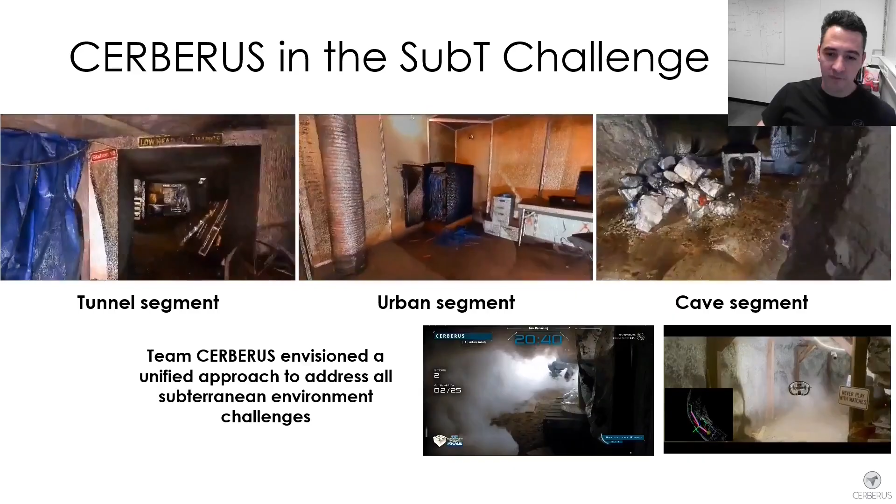As demonstrated by DARPA in the Subterranean Challenge, the interest is for a robotic solution that can navigate, explore, and search very diverse underground environments, from underground mines to subway stations to natural caves of different types across the world. Team Cerberus envisioned from the beginning a unified approach relying on legged and flying robots to autonomously explore and search such diverse settings.

In this presentation, together with my colleagues, I'm going to present how our team went about developing versatile robots for subterranean environments, the resilient perception capabilities on board our systems, resilient autonomy functionalities, artifact detection pipeline, and our solution for communications.

In further detail, we're going to discuss dexterous legged and flying robot systems in Team Cerberus, the multi-modal sensor fusion approach for resilient localization and mapping across all the robots of Team Cerberus, a unified exploration path planning methodology across legged and flying robots, our high-performance artifact detection and localization pipeline, and also our solution for self-deployed subterranean communications and networking across our robots.

And of course, I want to highlight that in this robot-oriented, robot-centric pipeline, the human aspect and the integration between human and robots persisted and remained particularly important.

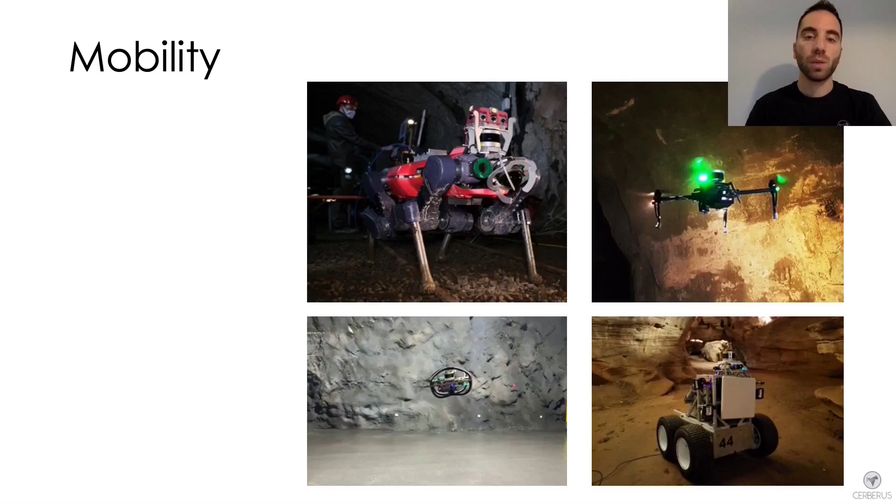Hi everyone. In this section, we will present the main mobility features of the robots of Team Cerberus. Specifically, we will talk about our legged, aerial, and ground platforms.

So let's get started. The first robot we present is ANYmal C, the legged platform used by Team Cerberus during the final event of the DARPA Subterranean Challenge. ANYmal is a quadruped robot produced by ANYbotics and customized by the Robotics Systems Lab to create its Sub-T version. This version is equipped with multiple sensors including LiDARs, depth, color, mono, zoom, and thermal cameras.

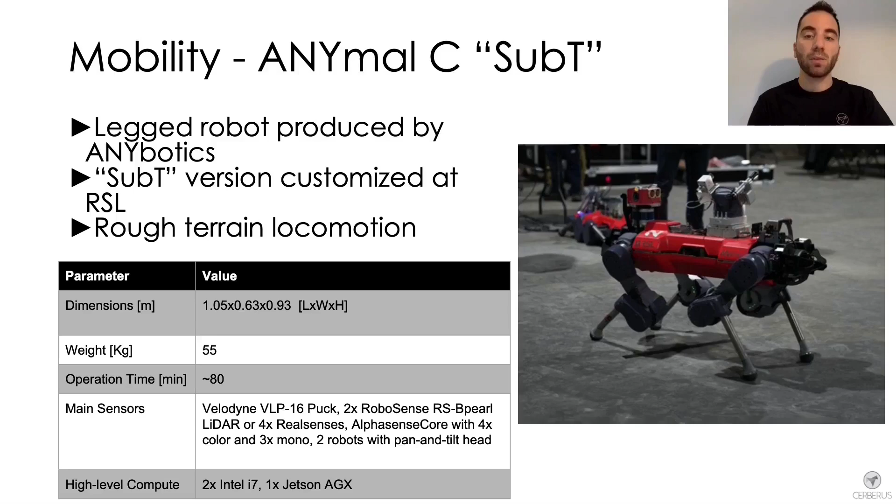ANYmal has a total weight of roughly 55 kilos, a payload capability of 10 kilos, and an operation time of approximately 80 minutes when continuously walking. During the final event of the Sub-T Challenge, we deployed 4 ANYmals in the course, and we had them operating simultaneously. In the following part, we will see the main software components used for locomotion.

The first module is a GPU-based terrain mapping software that is able to process input point clouds in real time and provide a terrain representation used for both locomotion and planning purposes.

This video shows an example of the robot navigating in a narrow environment while the terrain representation is built during operation. The elevation map you see is actually composed of multiple layers, each used for different applications. The elevation layer is mostly used for locomotion and visualization purposes, whereas the traversability layer is used to plan local traversable paths. Finally, the upper bound layer is used to handle negative obstacles during the local path planning phase.

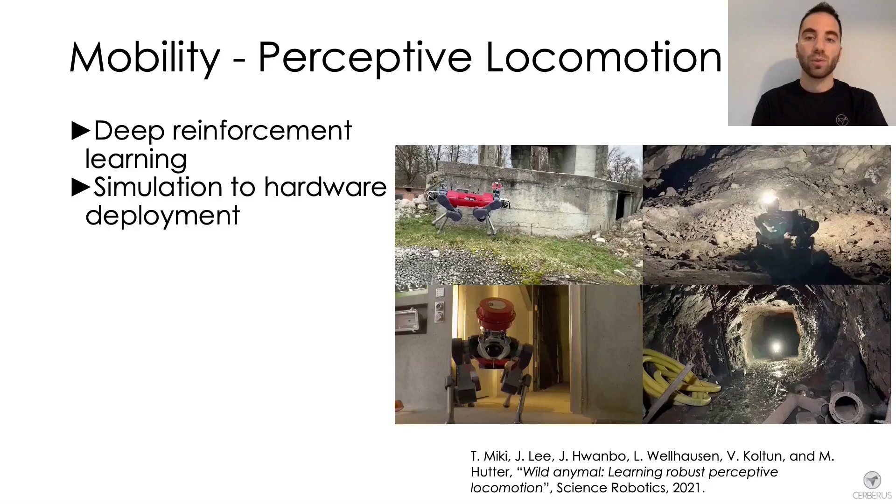Another main software component is our deep reinforcement learning based locomotion controller. This video shows the perceptive controller used in different scenarios with the ANYmal robot locomoting over a variety of rough terrains.

This controller uses a policy trained in simulation and directly deployed on hardware, and it is also one of the main differences with respect to the other teams that deployed legged robots with a model-based locomotion controller. To achieve a high level of robustness, we also apply randomization during training.

For instance, randomized height scans in the elevation map are applied to handle sensor degradation in extreme conditions and challenging environments. As you can see in this video, the robot is able to keep on walking even in an area where a lot of smoke was released.

Moreover, mass, frictions and external disturbances are also randomized to cope with slopes, stairs, and in general rough terrain. This policy was deployed on all the ANYmals during the final event and proved to be extremely robust and never failed. The third component used for locomotion purposes is a reachability-based navigation planner, utilized to generate local traversable paths.

This module is based on a reachability method which explicitly allows stepping over obstacles, and thus it is tailored for the ANYmal quadruped robots. Specifically, given a local terrain representation from the elevation map, the state of the robot and the goal to reach, the planner generates traversable trajectories.

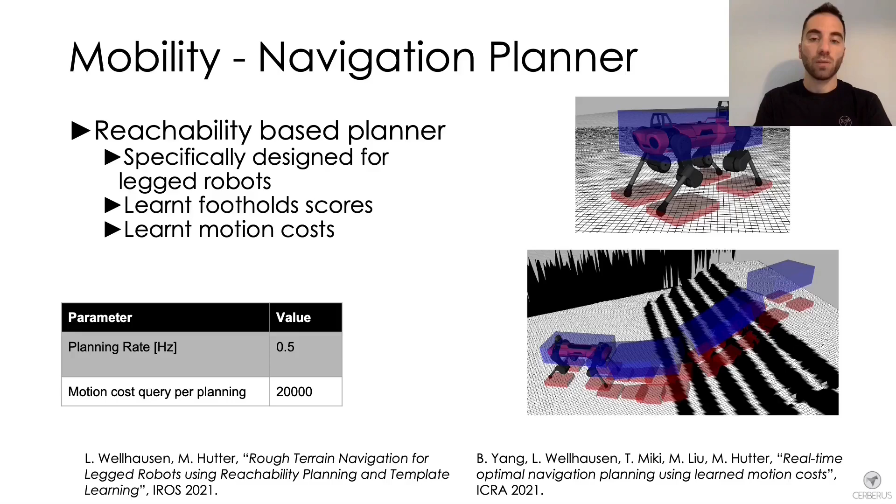Moreover, we provided the planner with template learning for steppable geometry to identify safe foothold locations. In addition, we deploy a local motion cost predictor that, given the height map and the current goal, provides estimated cost and risk, which then can be minimized during planning.

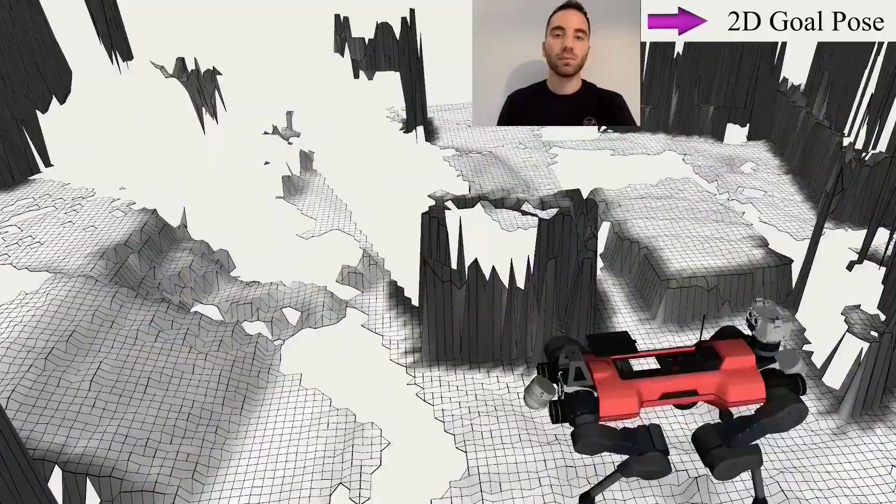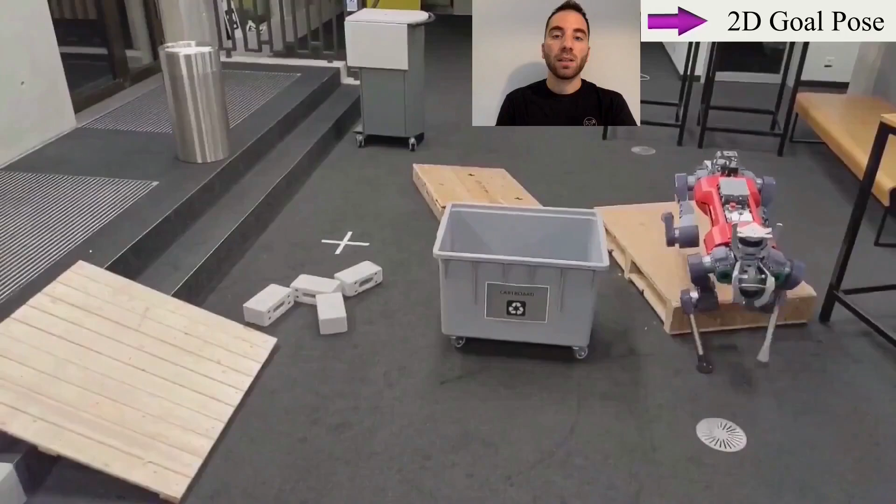This video shows ANYmal navigating different goal poses on uneven terrain. The planner copes with partial and missing map information and significant map noise caused by the onboard odometry system while maintaining fast update rates.

The second robot we present is RMF, a resilient microflyer drone developed at the Autonomous Robots Lab. With only 38 centimeters in length and width and a total weight of 1.4 kilos, this is the smallest and lightest drone employed by Team Cerberus. This drone features a LiDAR and a camera sensor.

Thanks to its agility, small size and robustness against collisions due to its custom frame, it can be deployed in particularly confined environments. In this video, we can see RMF autonomously flying in a narrow section of the tunnel area during the post-event of the finals.

The third platform we present is the Gaston Gagarin drone. This is also a collision-tolerant platform developed by Flyability and further customized by the Autonomous Robots Lab. This platform is specifically designed to cope with narrow environments and vertical shafts.

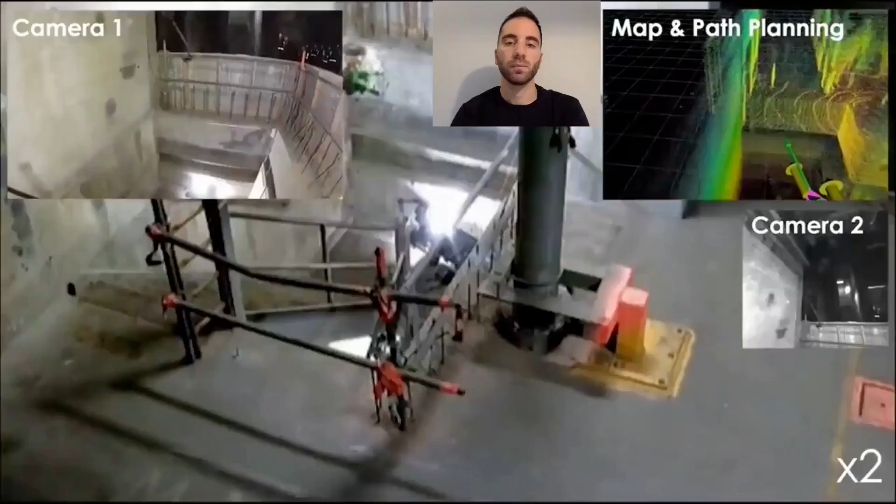The fourth robot we present is the Alpha Charlie platform. This robot is based on a DJI frame and a customized flight control software developed at the Autonomous Robots Lab. It's a bigger drone compared to the previous platforms, but thanks to its higher payload capability, it can carry a broader variety of sensors, including LiDAR, color, and thermal cameras.

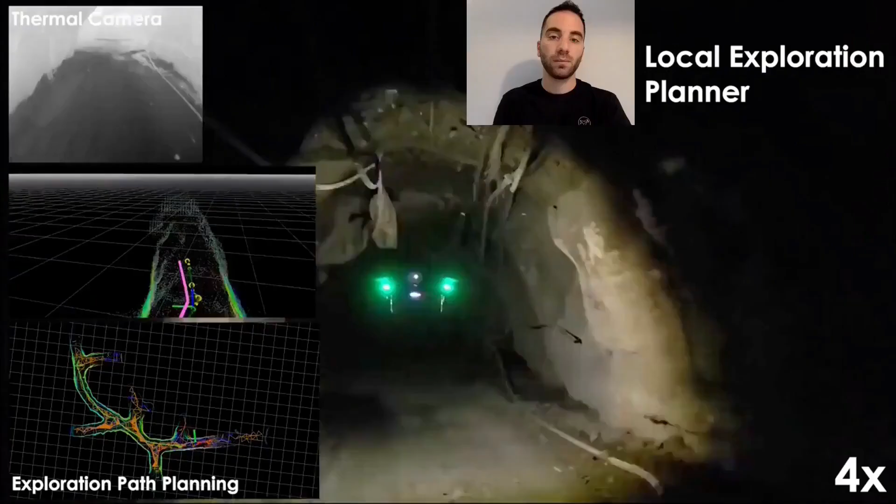Thanks to its multi-sensor suite, this platform can penetrate obscurant and dusty environments, also in the presence of smoke.

The last flying platform we introduce is the Voliro Kolibri drone. This tricopter drone is produced by Voliro and further customized by the Autonomous Systems Lab. The tiltable rotor design makes the Kolibri able to change pitch independently of its motion, as well as hover at any given orientation.

This platform has a considerable payload capacity and a higher operation time compared to the other drones of the team, and therefore it is specifically suited for long-term autonomy tasks in confined space, as well as vertical exploration tasks.

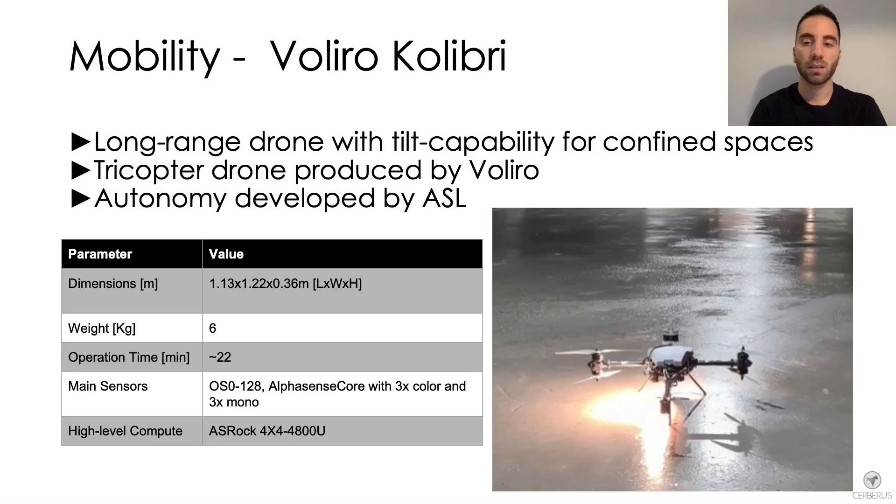The Armadillo Rover was the only wheeled robot deployed by Team Cerberus. It was used to support underground operations and extend communication range of the other robots.

It is equipped with a high-gain directional antenna and connects to the ground station using a fiber optic cable that can be incrementally released using a spooling mechanism.

I am Shehryar Khattak, and on behalf of Team Cerberus, I'll be presenting an overview of the localization and mapping approaches deployed by Team Cerberus in the DARPA Subterranean Challenge, and especially in the DARPA Subterranean final competition.

Robot navigation in austere environments presenting a number of challenges, for example darkness, fog, dust, narrow corridors, were an essential part of the competition. Early on in the competition, we in Team Cerberus identified that multimodal sensing would be a key element of our approach.

Given this, we investigated a number of localization and mapping approaches utilizing different sensing, for example LiDARs, thermal cameras, visual cameras, inertial units, and robot kinematics, and also understanding the synergy between these sensing inputs, how we can use them in a complementary way so that robust localization and mapping can be enabled for robots in these austere environments.

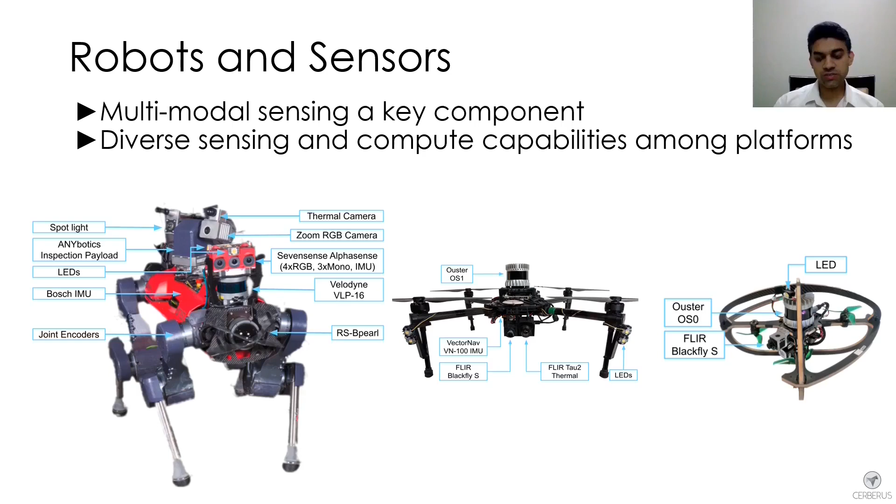Given these constraints and this diversity in compute and sensing modality, we opted to develop a flexible and hierarchical fusion approach. Flexible in the sense that given the subset of sensing modalities available, you can utilize them, and also flexible in that if compute is limited, we can choose not to fuse some sensing modalities and still have a reliable, robust approach.

We achieve this in a hierarchical fashion: estimators run independently, and if their estimate is good enough, it is propagated to the next step. If a module can't run, we just ignore it, and the pipeline always goes from left to right. We term this approach complementary SLAM, because it enables taking advantage of all the complementary capabilities that these sensing modalities provide.

For example, thermal cameras are very good when navigating through fog, and LiDARs are very good at creating large-scale maps or providing direct measurements. As mentioned, for propagating these estimates from left to right, each step was checked given some health evaluation criteria.

These criteria were both at the data level. For example, for camera images, we would track spatial entropy not only spatially on the image, but also temporally, to understand if there are features that are untrackable. For example, if you have dust and you're tracking spatial entropy temporally, you can actually remove dust from the images and still track features that are more stable, allowing VIO in an industrial environment.

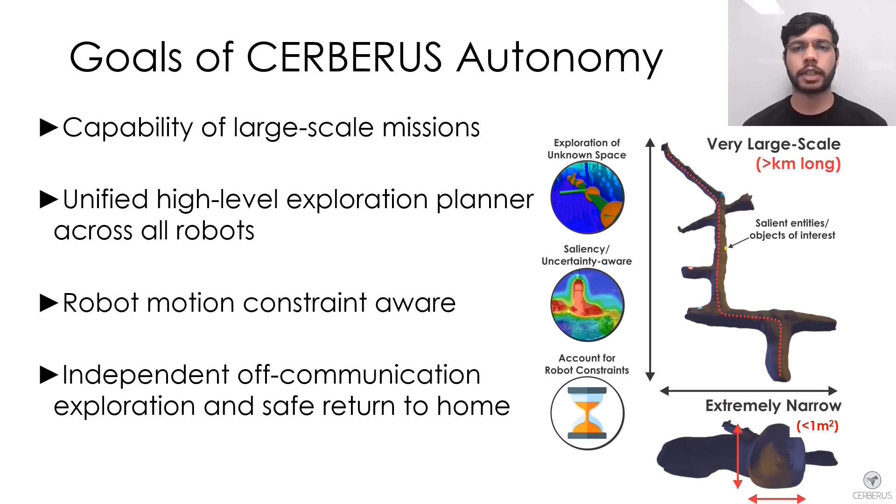The development of the Cerberus autonomy is driven by the challenges of subterranean environments. We aim to enable resilient autonomy with minimal human supervision in very large-scale environments that present challenges such as difficult terrain, narrow passages, and multi-branching and multi-level topologies. The autonomy system should be generalized across all the robots, but at the same time capable of handling robot-specific constraints and exploiting the advantages of robots' mobility.

The human supervisor is responsible for high-level coordination, deciding what part of the environment each robot will explore, while each robot performs its assigned exploration task fully autonomously. We utilize a graph-based exploration planner that is developed to work across all the robotic platforms of the team. This planner has a bifurcated local and global planning architecture to handle large-scale environments as well as perform efficient local exploration considering robot constraints. The paths provided by the high-level exploration planner are then tracked by the robot-specific navigation modules.

At the core of our autonomy lies the graph-based exploration planner called GBPlanner, which utilizes a bifurcated local and global planning architecture. The local planner is responsible for rapid exploration within a local space around the robot and provides functionalities to handle robot-specific constraints. On the other hand, the global planner is responsible for repositioning the robot to unexplored areas of the map when the local layer cannot find an informative path.

At the same time, the global layer also provides safe paths to return the robot to the home location within the robot's endurance or a predefined mission time.

In the first step of the local exploration planner, a collision-free graph is built within a volume around the robot. This volume is adaptively calculated according to the local environment geometry. In case of aerial robots, the edges of this graph are simply collision-free straight lines.

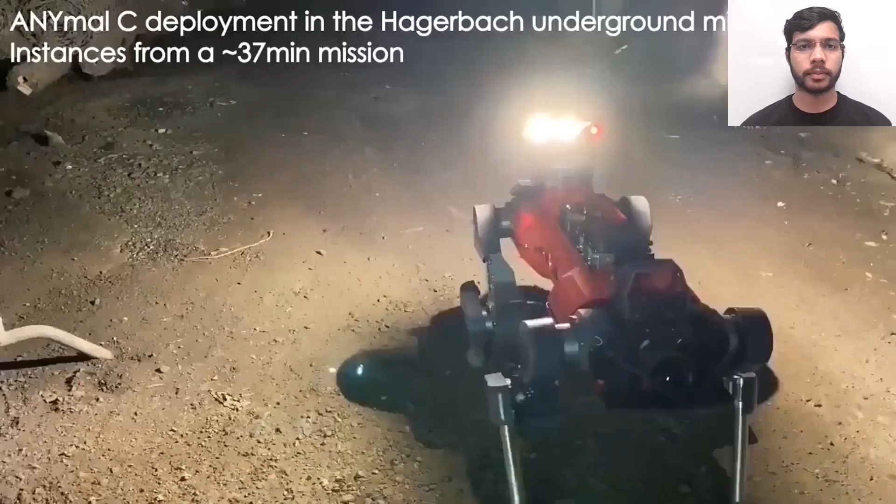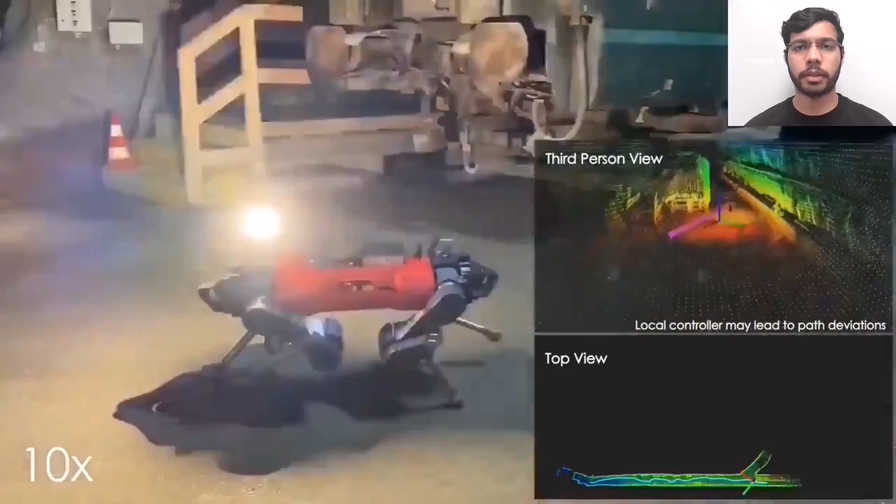In this video, we show two experiments conducted as part of the preparations for the final event. The experiments were conducted in the Hagerbach mine in Switzerland. The first part shows a mission conducted by the ANYmal. This demonstrates the ability of the planner to navigate over slopes, handling multiple branches, and autonomous homing.

At this point, the robot reaches a dead end, and the global repositioning is triggered. Towards the end of the mission, autonomous homing is triggered, and the robot returns to the home location.

The second part is a mission of the RMF-Owl collision-tolerant robot. This shows the planner running on a computationally constrained system. This mission involved fully autonomous exploration followed by homing, totaling an 8-minute long mission.

Here, we show an instance in the prize run where the ANYmal is exploring the tunnel section and then enters the cave section, passing through some confined areas. The path given by GBPlanner is shown in yellow, and the path shown on the ground is the traversable path generated by the navigation planner.

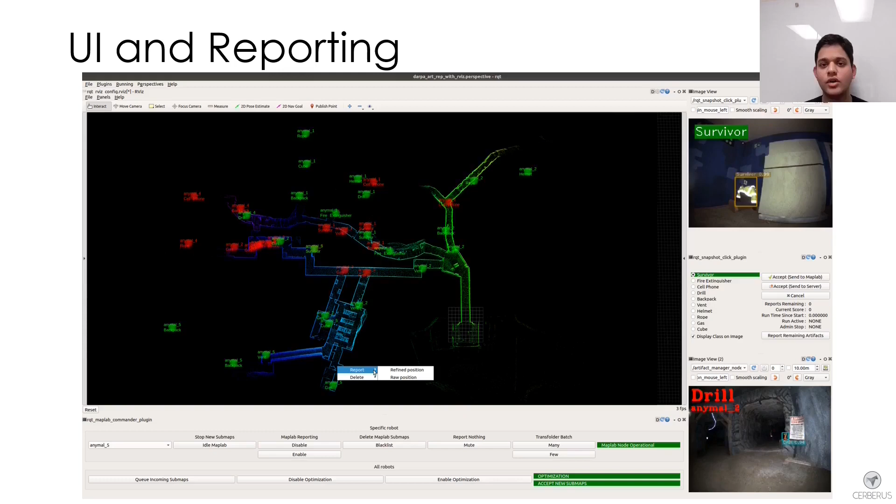The human supervisor is also presented with an option to report the location of the artifact based on the robot's estimation or to report the location as optimized by the multi-robot mapping framework.

To detect the artifacts, each robot had a different set of sensors and hardware for processing images. ANYmal C was equipped with a Jetson Xavier GPU that performed detections on multiple image streams. Cameras on the AlphaSense payload and a higher resolution zoom camera on the inspection payload were used to detect artifacts. The aerial robots used lightweight hardware for object detection, with the M100 Aerial Scouts and Kolibri platform using the Intel Movidius stick and the RMF-Owl platform using a neural processing unit. The Super Mega Bot platform used a dedicated GPU on the onboard computer.

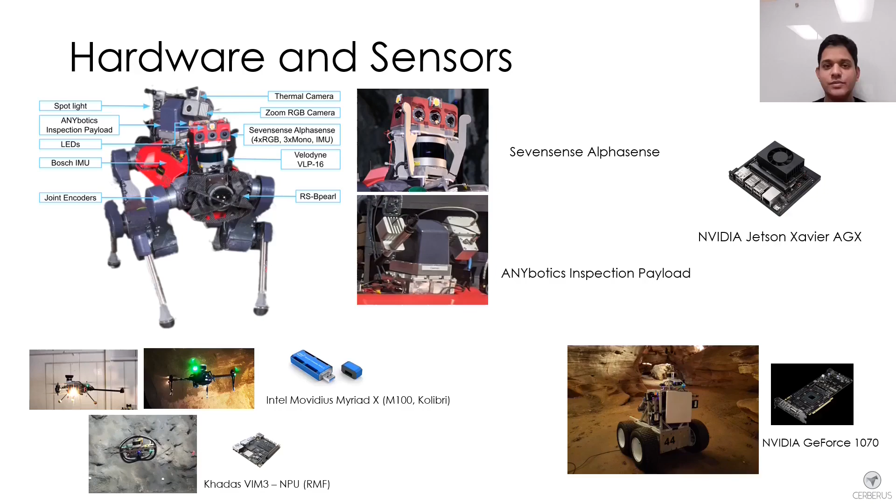For the prize round of the final event, we correctly detected a total of 23 artifacts. The reported location of each artifact is shown with the color of the robot that detected it.

Hi everyone and welcome to the communication block. In this short talk, I'm going to cover the networking structure used by Cerberus in the final run of the competition. Furthermore, I will talk about systems that had special networking capabilities as well as the software that was running to enable communication.

In complex and large-scale environments, such as faced during the Subt challenge, a single communication point where all robots connect to directly was not sufficient, as the topology would not allow maintaining communication. For instance, signal strength drops drastically with distance in such environments.

But at the same time, communication is the core component to provide situational awareness to the operator. So the longer the communication is established, the longer information can be transmitted to the operator, and the earlier data can be sent again once the robots return.

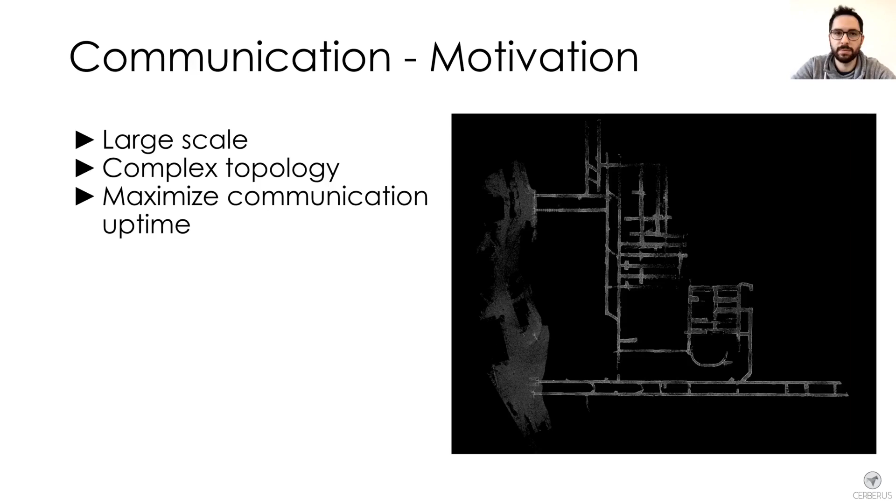To establish communication for as many minutes as possible during the run, Cerberus used portable wireless mesh network nodes manufactured by Rajant. These nodes had a dual capability in the sense of forming the actual mesh network, as well as providing an access point for clients that were not directly extending the mesh network.

So let's get started with the networking structure. From mission control, we connected the first mesh node with an Ethernet cable. This node was directly mounted on a tripod in the staging area of the competition and served as a base station.

Moreover, we connected an optical fiber cable to a movable Rover. This way, we could extend the range of the high bandwidth connection to the base station. Each one of our legged robots was carrying a Wi-Fi node and therefore is part of the mesh network.

On top of that, 2 of the 4-legged robots also had the capability to deploy up to 4 mesh nodes to extend communication even further.

The aerial robots did not directly extend the mesh network, but connected to the access point broadcasted by each mesh node. As all nodes were broadcasting the same access point, the aerial vehicles could change which node they used to connect to the base station via the mesh network. This also included the walking robots.

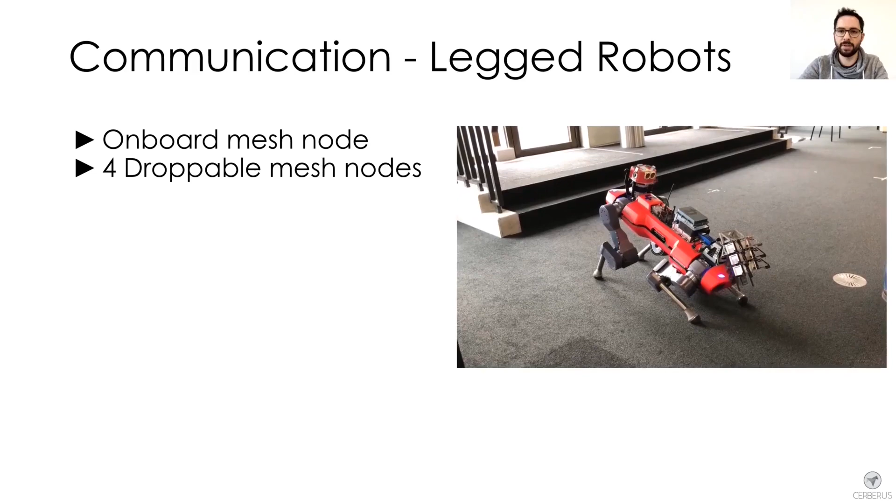2 walking robots were carrying droppable nodes that could be deployed by performing a tilting maneuver while releasing the magnet that is holding the Wi-Fi beacon. The beacon's antenna holder is 3D printed and had a passive release mechanism to unfold as soon as it was deployed.

Let's move on to the software packages used by Cerberus to establish communication during the challenge. We deduced the following requirements: the software was required to handle a multi-agent system as well as unreliability and connection losses. A scalable solution would also use low bandwidth.

As a team, we decided to stick to ROS1 for this competition. These requirements are not fulfilled by the standard implementation of communication in ROS1. Therefore, we had to evaluate additional solutions. Specifically, we looked into Multi-Master FKIE and the Nimbro network.

We decided to use Nimbro network for the following reasons. First, it can handle a multi-agent setup in the form of a multi-master operation, which also applies to the Multi-Master FKIE solution. In terms of reliability and handling of connection losses, the Multi-Master has an advantage in that it can do automatic topic and host discovery. However, we did not really need that, as it was clear from the beginning which information had to be sent. What seems like a drawback of Nimbro in the end was more of a benefit, as we could clearly specify which topics we wanted to transfer.

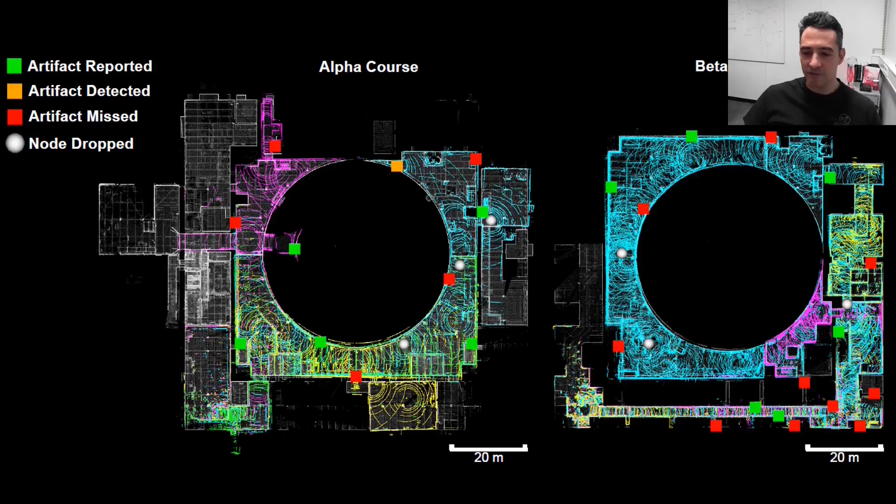It has an optical fiber cable, connected to the ground station, and a high gain antenna. It was already the first time that the artifact detection pipeline, although not very mature, allowed us to detect a significant subset of the artifacts automatically. This is what we achieved in the alpha and the beta course of the Urban Circuit of the SubT Challenge.

In the final event, our team came much more prepared with much more capacity in terms of the robotic systems utilized. We already had switched from the ANYmal B robot to the ANYmal C robot, with I would say an order of magnitude improvement in locomotion capabilities, robustness, and system reliability.

Our perception system remained focused on its capacity to enable resilient localization and mapping in GNSS/GPS-denied environments that presented sensor degradation, including smoke and other types of obscurance. We had much more field-tested, verified, and robust unified exploration path planning across legged and flying robots, a mature artifact detection and localization pipeline, both vision-based and also based on Bluetooth and gas detection, and relatively more mature communications and networking solutions compared to our previous deployments.

As we participated in the final event, we quickly identified that our legged robots were the best fit for the task, as the environments were, for a large subset, particularly confined.

With each robot able to explore autonomously on its own, as long as we provide an allotment of an area, the robot will explore and make sure to come back into an area with communications link available. We went for a technique that will allow us to span the exploration with as much breadth as possible early on in the prize run of the Subt challenge, and then progress incrementally deeper into the underground environment, while simultaneously detecting and scoring the artifacts.

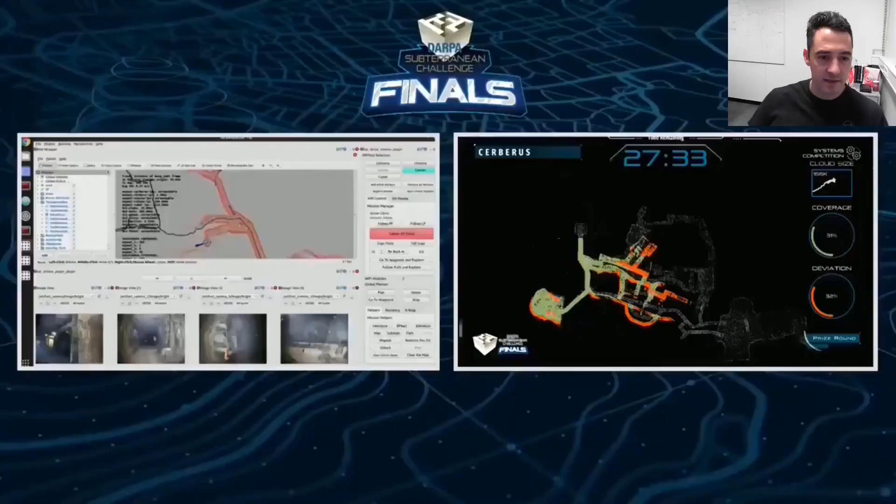This is our team, and we were able to be there in Kentucky for the competition. Of course, many more people were behind the scenes to support the technology of these systems.

This is also all the robots we brought for the final event. This is some instance of us winning the competition and holding the prize, of course.

And with that, I want to go into the lessons learned. I want to highlight that from our perspective, it was quite important to invest from the beginning into one solution, this combination of legged and flying robots, and also unify a lot of the technologies for perception and path planning early on. Despite the fact that this meant for us that not everything was very mature in the beginning,

we believe it was a successful direction, and we also saw from the other teams that a lot of the other competitors eventually utilized significantly legged and flying robots in their competitive rounds.

We believe it's also very important to focus on perception autonomy, and robust performance across those allow us to offset and mitigate the risks from other tasks, for example, from not having the most robust communications.

Focusing on system reliability and readiness for the competition is important, but of course, one has to develop novel technologies, and this is what the Subt challenge called for. So we need a good balance between developing good novel technologies, but also freezing working software well in advance of the competition and making sure that things are ready to be deployed for the event.

I think having a robust communication networking solution remains important, but luckily limitations in communications performance were able to be mitigated, as mentioned, with higher degrees of autonomy.